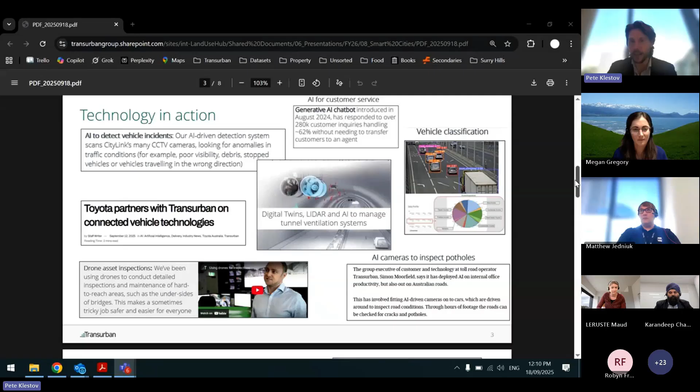A bit of a run around the grounds as to some of the technology being deployed. We're using an increasing amount of AI across the company, whether that's to detect vehicle incidents, crashes and congestion, or new AI chatbots, which have found to be hugely popular.

We're using digital twins and LiDAR to manage some of our tunnel fan systems, which doesn't sound like a lot, but I read recently that over half of the energy in our tunnels actually comes from managing these fan systems. So little things like that matter.

Just in the news recently, Toyota's partnering with us on connected autonomous vehicles, plugging into our assets. What that means is it's almost like an ability to see around the corner, as it's been described to me. And a whole bunch of other things as well.

This map on the right shows some vehicle classification work we've been doing, not just to know things around tolling, but it's actually part of our prediction side, where we're trying to figure out what type of trucks and cars they are, and where they're traveling to and from. So it forms part of our economic model.

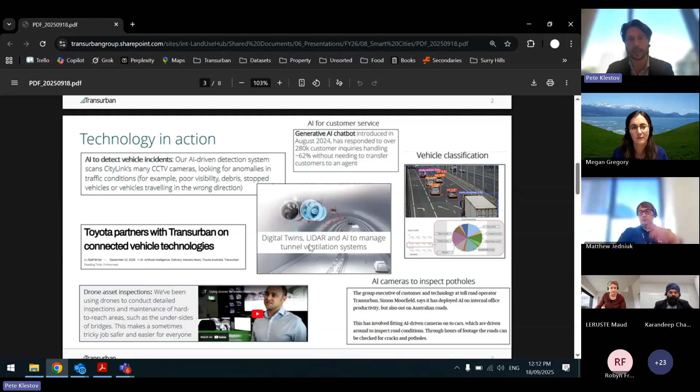There's obviously technology everywhere on our assets, but the work that I do and the team I'm in is actually much more about peering into the future. We want to know the future of our cities, because if we have an understanding of the future, we're able to better provide value with the motorways we're building.

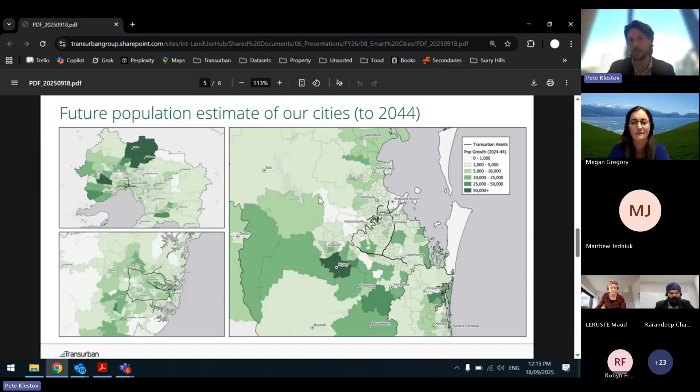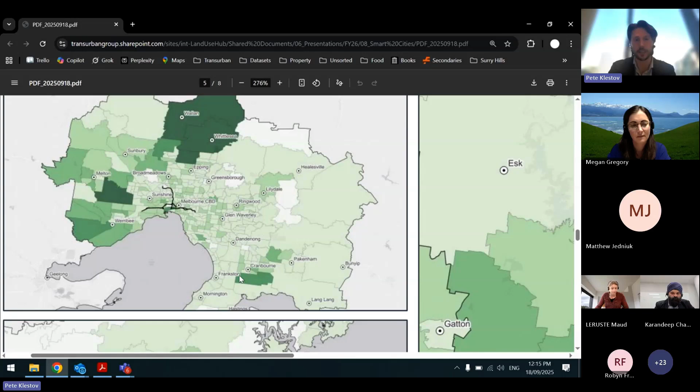We're certainly seeing those trends play out, and that's how we're anticipating that future growth to occur. So I'll zoom in quickly on Melbourne. We're very much expecting huge amounts of population growth happening in the northern regions, and also out to the west and partly the east, in those outer growth areas.

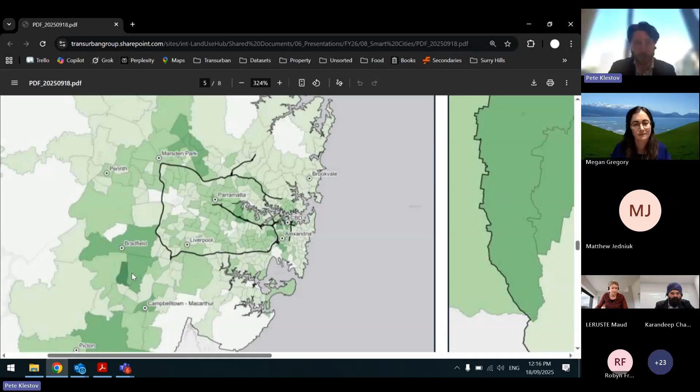Sydney, same story - a lot of growth around the northwest growth area, so Marsden Park, Kellyville, those sorts of areas, as well as the new city around Bradfield and the Western Sydney Airport. And a similar thing is happening here in Brisbane.

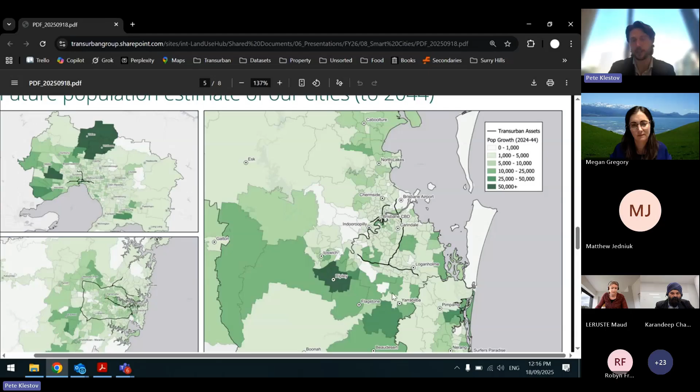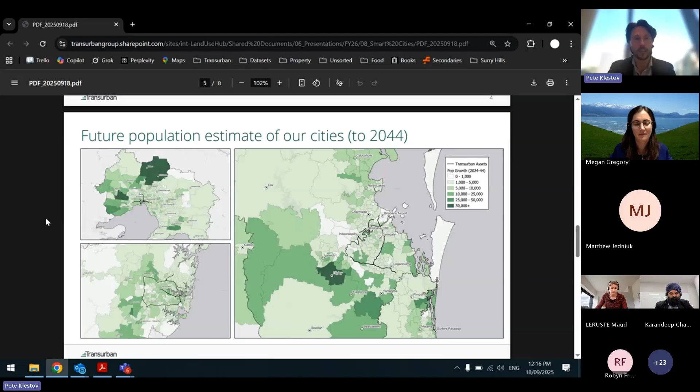Down in this Ripley Valley, Yarrabilba type areas, we're going to see a huge amount of growth. So again, this all shows that despite our efforts to try to get people to move into the city, the reality is that people are still moving outwards, and we need to make sure the infrastructure reflects that.

So a bit more of a discussion about what the future holds from a technology perspective within the company. At its core, where we're at as a company, and certainly on the economics and demographic side, is we're always doing a lot of measurements based on a lot of aggregated data.

Things that are almost at a suburb level or slightly smaller than a suburb level, and we're blending a lot of data together to inform the future. But we're actually embarking on almost a future modeling program where we're basically in the midst of creating what we're calling a transport digital twin - really trying to break down that aggregated data to disaggregated data. Rather than looking at things at a block or suburb level, how can we bring that down to understanding our city by the building level or by the individual or agent level?

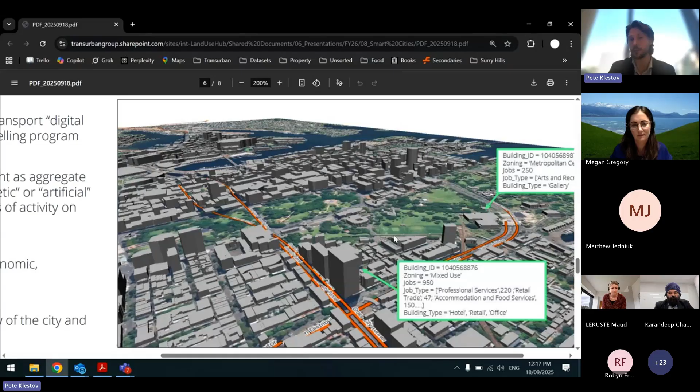This is a bit of an example of what would happen - we've been developing systems where we're actually able to estimate the number of people within each building, and not just that, the number of jobs and the types of jobs within each building as well. What that means is that at Transurban, we're all about trying to figure out where people live, their origins, and also where they work, their destinations.

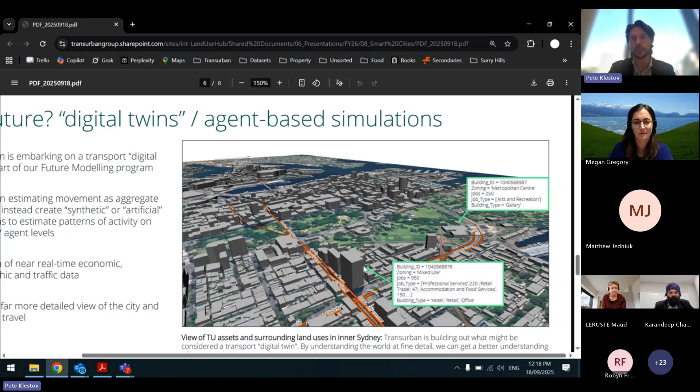So if we've got a really clear understanding of individual locations of where they work and where they live, we can connect those two together and get some really good insights and provide some really good value for money. So it's all about integration of a lot more real-time data to create almost these digital twins.

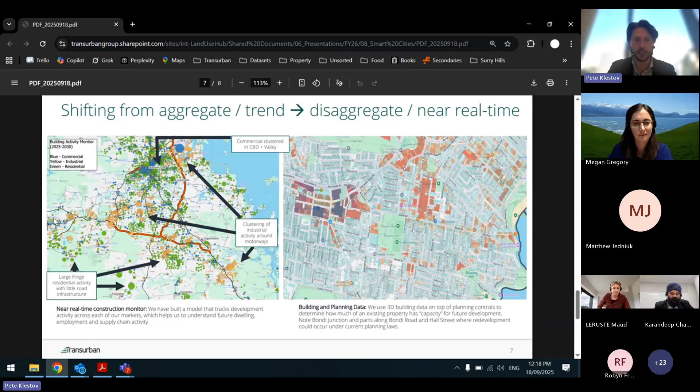Just a bit of an example on my side, this is the final slide, just a bit of a proof point as to how we're shifting to more of this disaggregated data. This here on the left-hand side is some real-time construction data we've been working with, and I've coloured it by residential, commercial and industrial. I think it highlights the scale of activity and the amount of construction happening in Brisbane, but also where we're seeing clusters of activity.

So we know industrial players love to be around Transurban's assets because they want to get around the city faster, and we're certainly seeing this play out. You're seeing a lot of industrial activity happening around our assets.

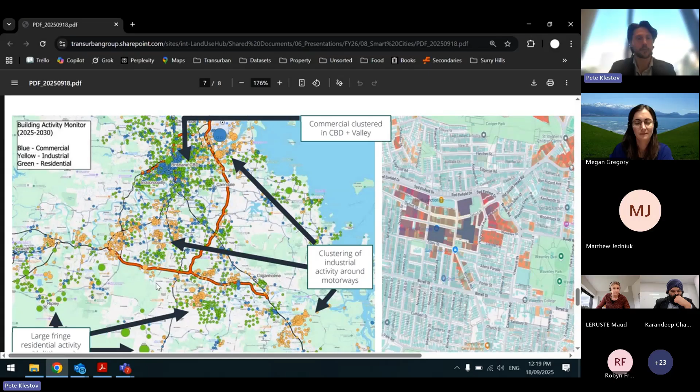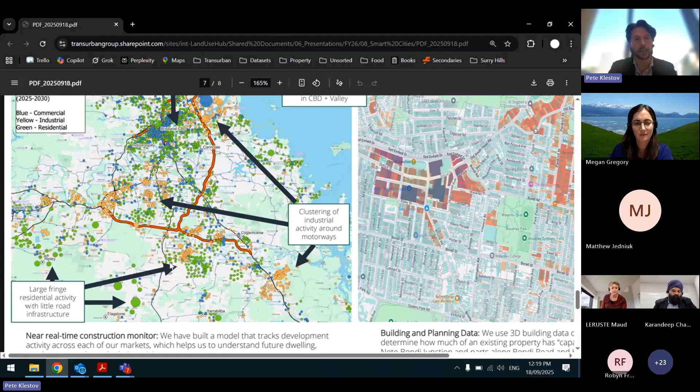But more interestingly for me, we're seeing a lot of continued residential construction happening in the fringes. If we're looking at a high level view of the road infrastructure around there, there's a question as to whether the infrastructure will be there to support that moving into the future, and what does that mean?

On the right-hand side is just an idea of how we're measuring development activity, or almost trying to predict the years after we get this construction activity. If we're thinking 5-10 years into the future, where could we see development activity occur?

This is just a map of Bondi Beach, and the areas we've highlighted around the train station of Bondi Junction, which is a no-brainer. But we're looking at planning data and the existing buildings to see that, based on the current zoning, these areas actually have a lot of space to go higher, whereas some of these ones down in blue are kind of built out.

So yeah, all in all, there's a huge amount of data and technology running through this company, and we're really pushing to be on the forefront of what comes next.

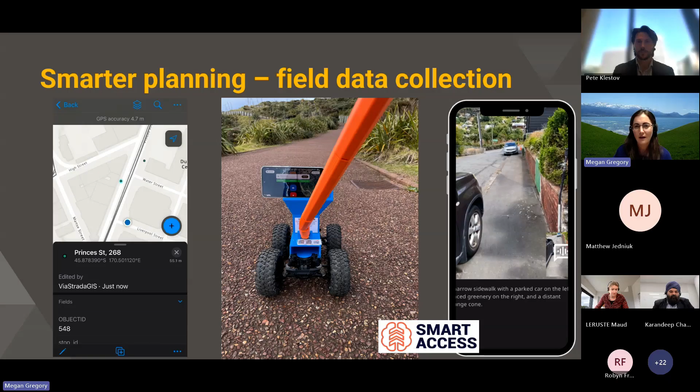I think GIS deserves its own mention. We use it a lot in the planning stages over the years, and it just keeps getting smarter. Firstly, we can use it as a platform for collecting data in the field. We can collate data from lots of different sources and use the GIS to make them talk to each other. We can look at our travel times and therefore catchment areas, and optimize the placement of our facilities. We can use it in planning and prioritizing a network once we've got all this information in there, deciding what to deliver and when. Over time, we can look at the trends that are occurring.

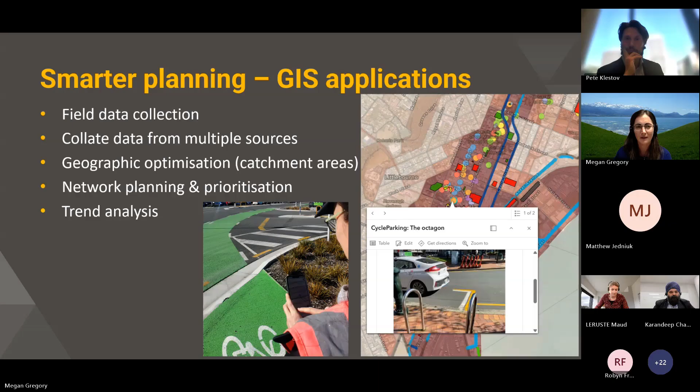To improve a few traffic control devices, or TCDs, especially traffic signals for cyclists and pedestrians. I think one of our favourite achievements is that we've introduced directional cycle signals. Previously in New Zealand, which I believe is the case in Australia at the moment, we only had one general signal for cyclists, analogous to our standard round signal for general traffic. With directional cycle signals, we can control different cycle movements coming from the same approach independently, similar to how we use green or red turning arrows for general traffic.

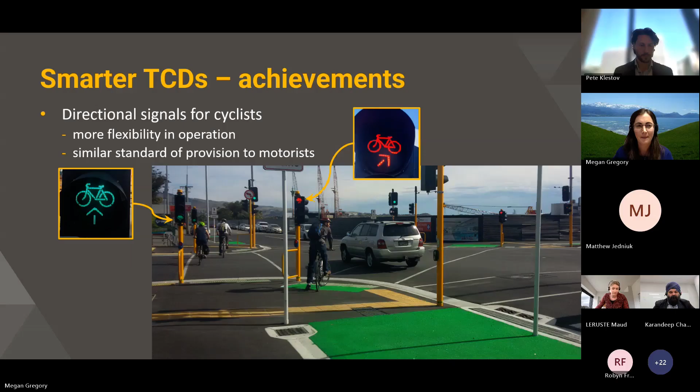Sometimes though, instead of treating cyclists more similarly to motor vehicles, we want to operate the cycle movement a bit more like a pedestrian movement, especially when cyclists are entering or leaving a shared space. So we've also been involved in trialling two aspect cycle signals, with just red and green aspects, operating similar to a pedestrian crossing signal. This gives us more flexibility in how we cater for cyclists at signalised intersections and crossings.

The recommendation from this is that they be incorporated into a TCD rule at mid-block crossings, but that there's more work and understanding to be done at Barnes dances or pedestrian scramble sites. Further trials are currently underway.

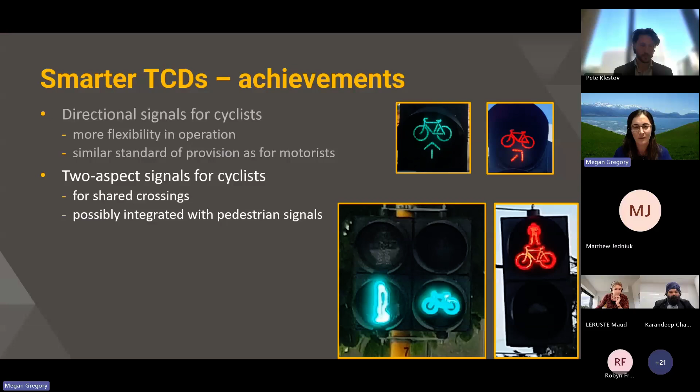There's a lot more I'd like to see happen in New Zealand, and lots we can learn from other countries. Currently here, we rely almost exclusively on fully protected movements for cyclists coming from a separated cycleway, which generally ends up giving cyclists a very small proportion of intersection green time, so they get a low level of service and high delays. I think we can improve this by operating safe filter turning of vehicles across the cycleway movement in the right context and with the right designs.

Since I went on a trip to New York City in 2016, I and SYSTRA have been advocating to trial flashing yellow arrows, to remind drivers to turn cautiously after giving way to pedestrians and cyclists crossing over a cycleway or a pedestrian crossing. We've had lots of support from within the industry here, but some resistance at the trial approval level, so we've been focusing on other things recently.

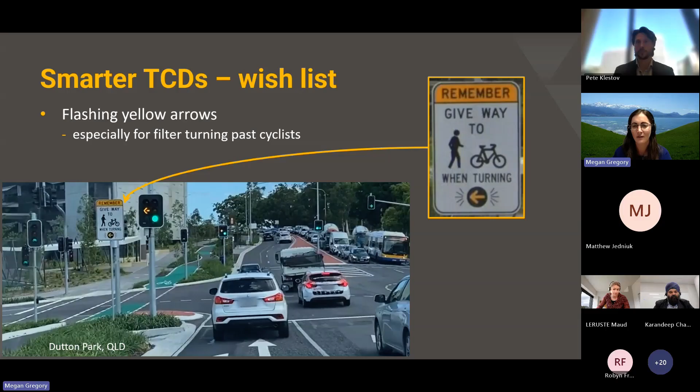It wasn't until I was doing the preparation for this presentation that I came across this example from Queensland, where Transport and Main Roads have actually implemented flashing yellow arrows. I knew there was some for pedestrian protection, but this is quite unique in that it's got a cycleway across there as well, and that's been a really useful case study for us. I think we'll be able to draw a lot on that experience. I understand from the team there that their context and reasons for doing it were a bit different to what we're dealing with here, but I think there's going to be a lot of good lessons learned coming from that.

The other thing I'd like to do is let small near-side signals for cyclists become a recognised device here, because sometimes following the rules for the placement of traffic signals just doesn't work, or doesn't turn out to be the smartest thing to do for cycle signals.

For example, this is our only existing small cycle signal site in New Zealand, at a cycleway in Auckland. You can see the cycleway goes around the bend, so cyclists aren't going to be looking to the far side of the intersection. They also can't really see the primary signal when they're waiting at the limit line. So by having these small near-side signals, they're able to actually see what's going on for them, make better decisions, and especially avoid conflict with the pedestrians on that crosswalk around the corner.

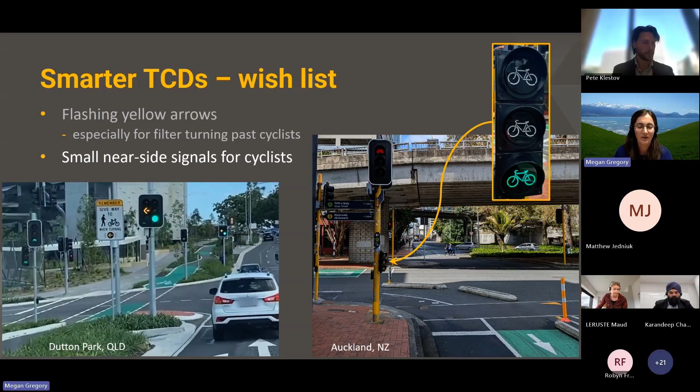There are lots of places in Europe and the United Kingdom that use small near-side cycle signals, and so I think we could get this done in New Zealand as well.

We talked a bit about collecting data at the very start of the project, and I focus now on collecting data about how users behave, which is also especially interesting to us when we're actually trialling a new traffic control device. We want to see how people respond to it.

At the moment, the current technology is really good at telling us who is where when. We can distinguish between different types of users, and track which way they're going through the intersection. We can get basic details on red light running, which comes down to whether or not someone progressed into the intersection during a red or yellow light. And some of the software is starting to give a conflict or near-miss analysis, which is trying to identify when users got too close.

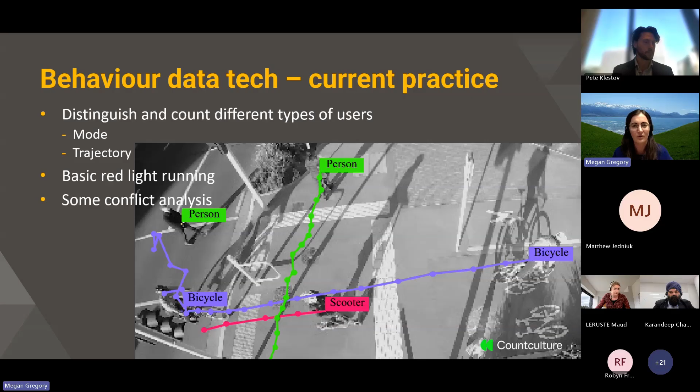But often when we're doing these things, we still rely on good old manual tabulation from video footage. This can be really good because it can help us identify behaviours that we didn't foresee, which is really useful when you're trying to study something new.

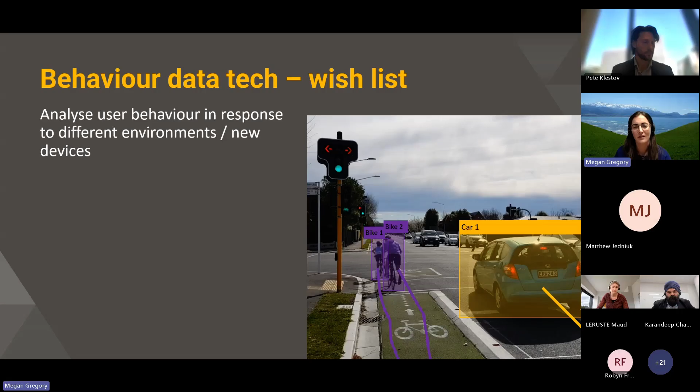So I'd like to be able to drill deeper into things like looking at the type of infringement. For example, for red light running, rather than just asking did a vehicle cross the limit line when the light was red, I'd like to know exactly when this happened in the phase.

Was it just after the light had gone red, or had the vehicle been queuing there for a while and maybe they anticipated their light was about to go green and took a head start? Or did they make a false start because they saw someone else's signal and just reacted to that?

And then, very importantly, what did the driver do after they'd made this breach? Did they continue straight through the intersection, perhaps without noticing? Did they actually catch themselves part way and stop over the pedestrian crosswalk? Or did they perhaps try to reverse back? Because all of those scenarios have a different effect on the actual safety of the intersection and give us a different understanding of why people are making this behaviour.

I'd also like to drill into the interactions between users. We could start by looking at some warning factors. For example, if this driver is indicating they're going to turn left, we can predict which way they're going to go and what effects that could have.

We should be looking at the types of parties involved. So here would be car versus cycle, similar to our flashing yellow arrows if we studied them. Or we might be interested in pedestrians versus cyclists, for example in the two-aspect cycle signal trials. And we wouldn't be looking just at physical contact or near misses, but really at whether people are changing their speed or trajectory to avoid conflict.

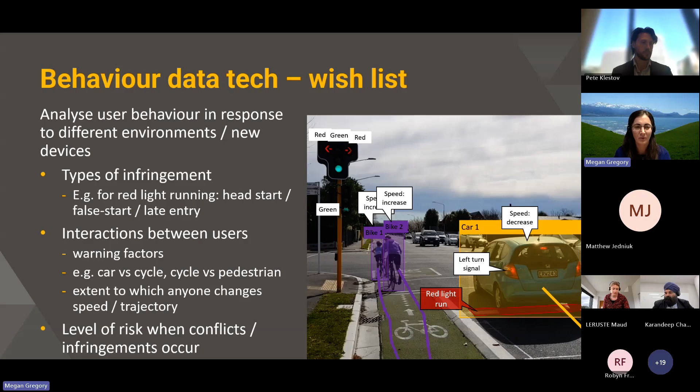Yeah, very insightful detection technology, as well as the digitization roadmap around active transport. I think there's a lot of companies in Australia as well that are following similar trajectories. Really interesting to learn about what's happening in New Zealand as well. We'll go to our next speaker, Matt, who's from GHD.

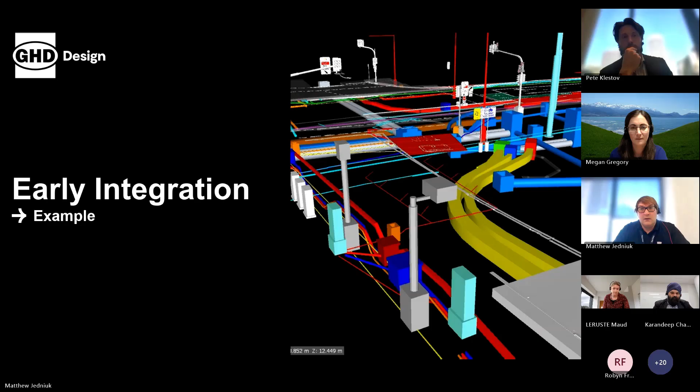The assets themselves - one of the biggest benefits is that our models carry data, not just geometry. Every ITS asset we design - a sign, a sensor, CCTV, pole, etc - we can have metadata attached: power, comms, installation details, maintenance requirements. That means the assets at handover are not just a drawing, but a fully described digital asset ready to plug into the operator's system, as well as being able to plug directly into the digital twin, which is really the key aspect these days, as it can then be future-proofed going forward.

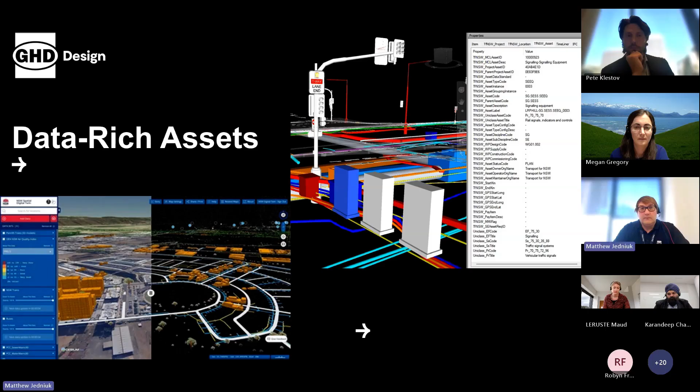This also gives us the ability to simulate how ITS will perform before we build it. We can model the traffic flows, lane closures, incident responses, even tunnel evacuations, and test how the ITS system, like smart signage or detection sensors, will respond. That reduces design risk and allows more evidence-based decision-making to be done before it gets to the real world.

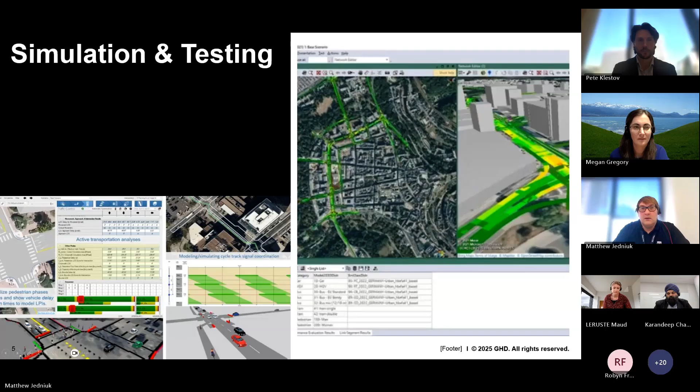The value in ITS systems is realized over decades of operation, not just construction. By handing over structured digital data, operators can integrate ITS assets into the SCADA or traffic management system immediately. This supports predictive maintenance, faster fault detection, and more efficient operations. This ensures that ITS continues to provide value long after construction is complete, and supports further integration into the smart ways of delivering and providing service to the public.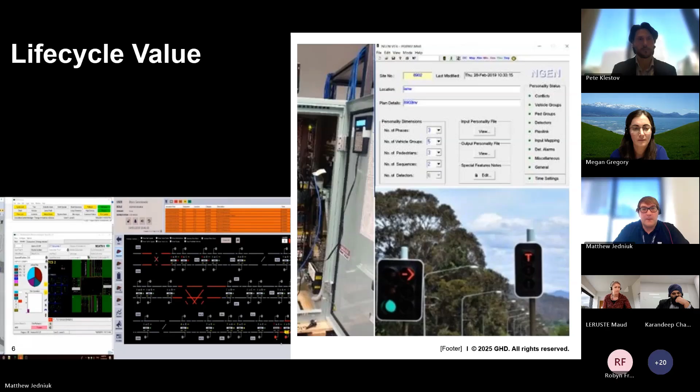Future outlook. This one was a little bit hard for me to actually talk about, purely because of how quickly everything is changing on a day-to-day basis. Things are being made obsolete so quickly.

But as ITS is the backbone for having a connected mobility, it really is about enabling autonomous vehicles, AI-driven traffic optimization, and integrating that across the entire road, rail, pedestrian, and active transport network.

I guess all of this really depends on how the design of the digital backbone is done today, like real-time traffic monitoring, dynamic traffic signals, incident detection, and where we actually place these assets, like Wi-Fi systems, etc. It's really going to be the cornerstone of how we build, maintain, and future-proof ourselves, because where we are now, in five years' time it's going to be completely different, I suspect, purely because of how quickly things are changing.

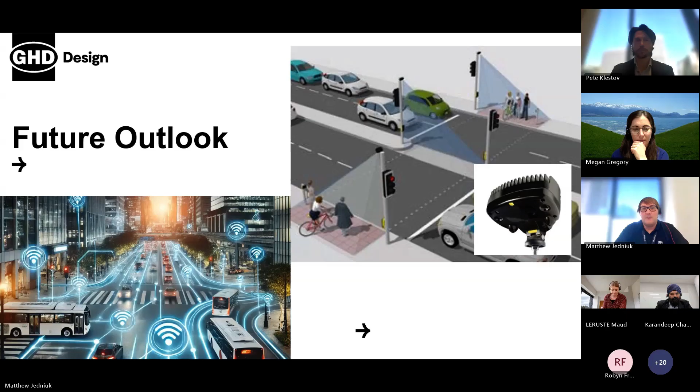So in closing, from a digital engineering perspective, ITS is more than technology deployment. It's about designing smarter infrastructure, creating data-rich assets, and setting up our transport systems to adapt to the future. ITS and digital engineering together are how we move from roads and rail to a truly smart, connected transport network. Thank you.

Thanks, Matt. Really appreciate your presentation. I think that was really insightful to learn about the actual framework being used across GHD as well. So next we'll go to Maud.

We'll be focusing in on rail modes in this presentation. Thanks, Maud.

No problem, I'm just trying to share the right screen. Yeah, let me know if you can see that. Yes. Great. Okay, yeah, so I'll try not to overrun, obviously.

SYSTRA is an engineering consulting group specialized in public transport and mobility solutions in general. We have a global network with presence in over 80 countries, and our first project in Australia was almost 20 years ago now. So it's been a couple of years we've been working in Australia, especially in Sydney, Melbourne, and Brisbane.

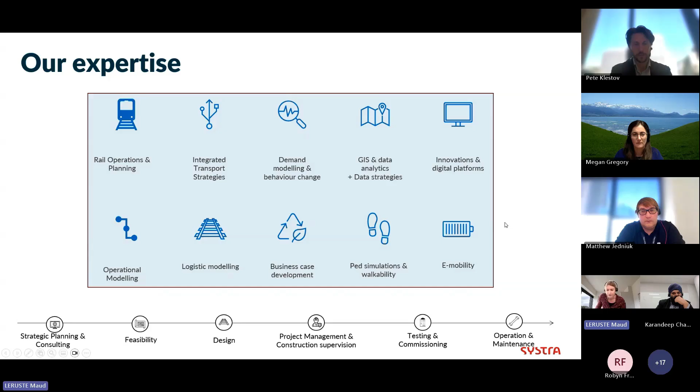So we can basically build a whole timetable in that particular software. We do a lot of capacity analysis on the network, trying to make sure we can accommodate all the service levels for future and long-term plans, especially for the governments. We can do a whole lot of conflict detection, understanding how to utilize infrastructure the best. We do a whole lot of things at platforms, understanding resource utilization in terms of drivers, trains, everything that is very relevant for the operator.

We also do a lot of scenario testing, so it's quite relevant to have access to a software that can do a whole lot of optioneering around. For example, typically for a high-speed project, you have to make sure you find the best alignment, achieving high speed, but it also depends on the alignment itself. So not having high gradients on your alignment, making sure you can optimize your rolling stock capacity as well. It's a whole lot of different components.

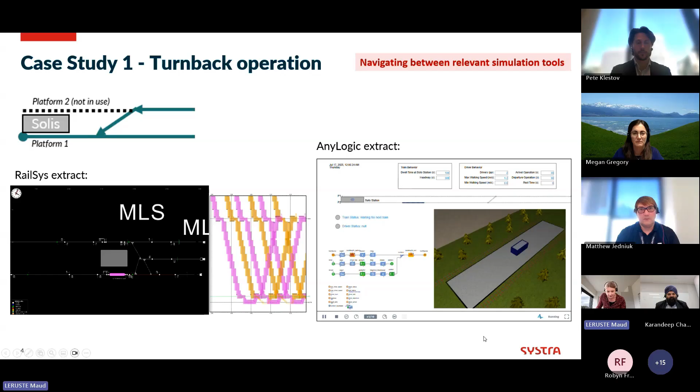So it's all a very conceptual kind of system, but I just wanted to show you that we can do very similar things in that space. It's not because it's a different mode that it's a different way to process the data, and we can use very similar data, but just for a different purpose.

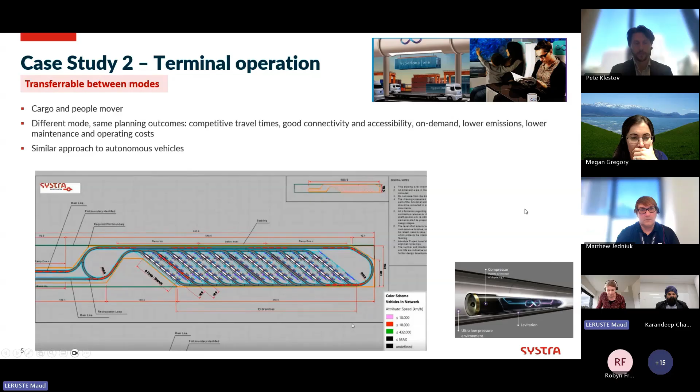I'll go to the next. I'm just conscious of time, let me know when I need to conclude.

It was easy to identify the bottlenecks. If we had to use some kind of spreadsheet or different software, it would have taken twice as much time as what we actually delivered. So it was pretty good.

I think we can definitely reuse this approach in the future to deliver other types of projects. This was quite innovative at the time, so we had to define everything from scratch. There was no other project we could focus our analysis from.

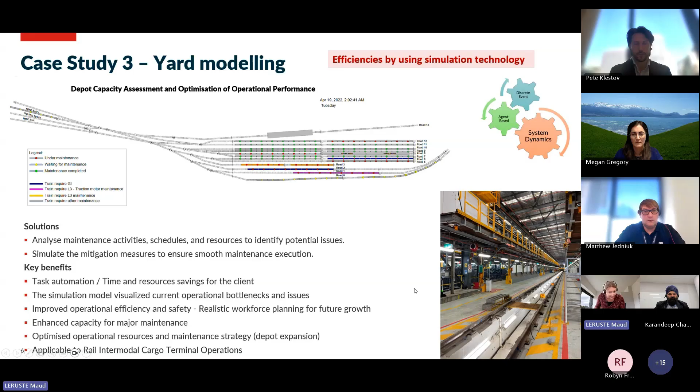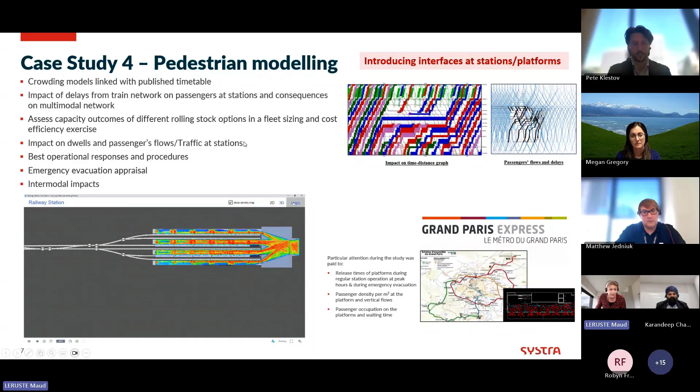That's more like a static way to build a timetable, but we are thinking there might be a way of showing passengers' flows on top of these train paths - that's the little graph at the top right. It's very interesting to understand the impact on dwells, and how it's going to impact your timetable and passengers' flows at stations, so it can be optimized within the station design.

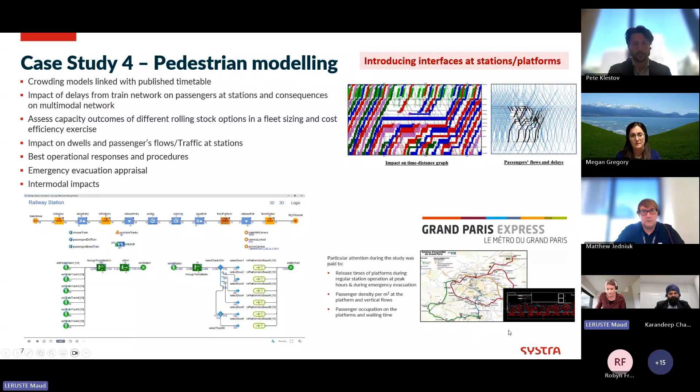We also do a whole lot of emergency evacuation appraisals, so it's very interesting to understand what's the best operational response in case of any failure incident on the network. That's the last example - they did quite a lot of that in Paris at the time of the Olympics as well, so it's very relevant here.

And then the last one - I don't have any videos for that, unfortunately. This was another study we did, trying to understand how we can link asset performance and service delivery on the network. Typically, from our RLC software, we could try and evaluate the on-time running on the network.

This is usually a metric that Sydney Trains would use. Sydney Trains is just an example, but as an operator, you want to know how many trains are late on your network and how well your services are delivered. We're trying to understand how asset performance is impacting that particular metric, because asset performance is not something you can really define in RLCs as well.

So we did another type of model trying to understand the correlation between the two. I thought it was pretty interesting because we could look at future strategies and investments. There's a whole lot of punctuality data analysis from which you can extract different KPIs and contributors to the delay - that's some of the graphs I have here.

It's trying to understand why your network is not performing the way you want it to. That's another way of doing that.

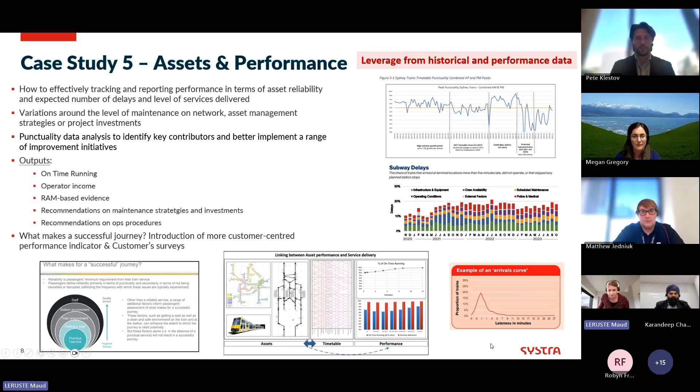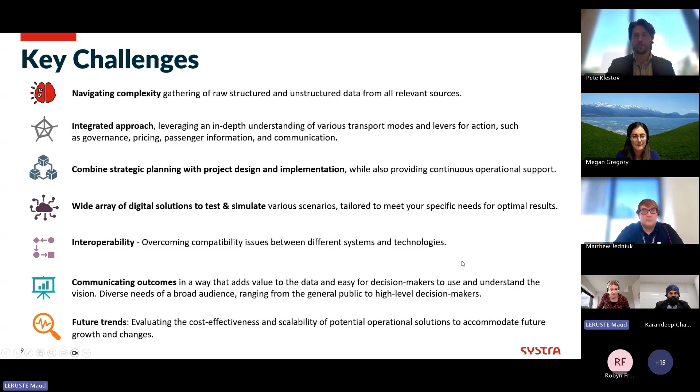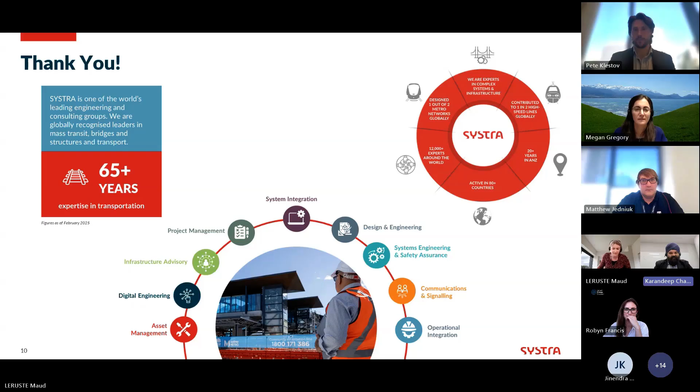Well, that was really good - a very rich presentation. Really appreciate your intelligence there and sharing of that knowledge as well. Considering the time, we've got 5 minutes, so maybe I'll just pose a couple of questions, and if the audience has any, feel free to put them in the Q&A, as I mentioned already.

Maybe I'll just quickly start off with the panel. In terms of digitization and implementing technologies, what are the main barriers you're seeing being addressed across the board? Is it the lack of investment dollars, the lack of understanding of the benefits, or more the clouded nature of technology and failures in technology, historical overspending and so on? What are the key issues you're seeing from your clients and organizations in terms of implementation of technology solutions?

Anyone can jump in and just start answering.

I think on our side, the inhibitor for us is almost a complexity argument at times. The more data you have, the more systems available to you, the amount of complexity to manage that rises quite substantially.

We're often embarking on a lot of different things, but to get it working effectively, you almost need to deploy a bit of a startup-y sort of nature. That's how we found it, where it's not about getting it perfect straight away. We've got engineers and data scientists throughout the company, and there's often a habit that we want to get right and perfect the first time with every bell and whistle. But the risk of that is it never actually gets completed because you've taken on too much complexity.